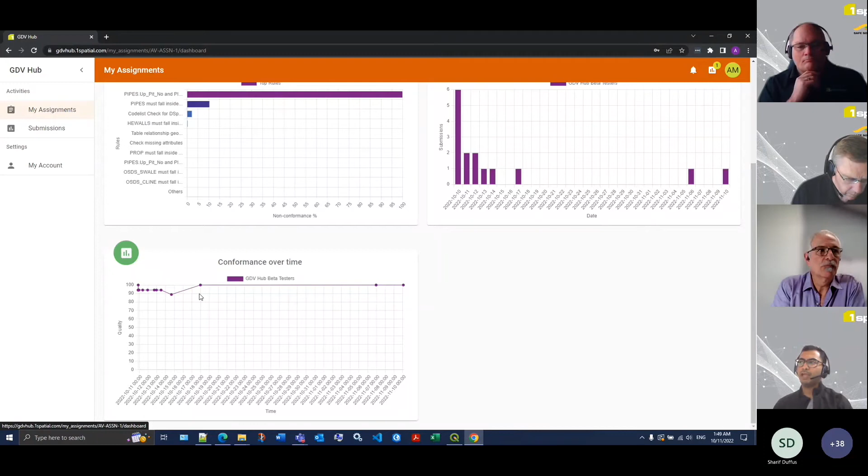It shows how the data validations are improving over time, which makes the validation process easier. We can know how the process is improving by looking at these metrics.

The final tab here is the saved mappings, which I'll demo in the submission. So to start a submission, we go to the submissions tab and click start a new submission at the bottom right corner.

We're presented with two drop boxes: the README file, which is optional, and the sample shapefile. Uploading is quite easy—you can either drag and drop to the box, or click on it to open up Windows Explorer.

I'm going to submit a shapefile, which I'll have to zip up before. So I'll zip the shapefile. I have the zipped shapefile here, and I'm going to hit continue.

It's uploading the shapefile, and I can see that there has been some mapping.

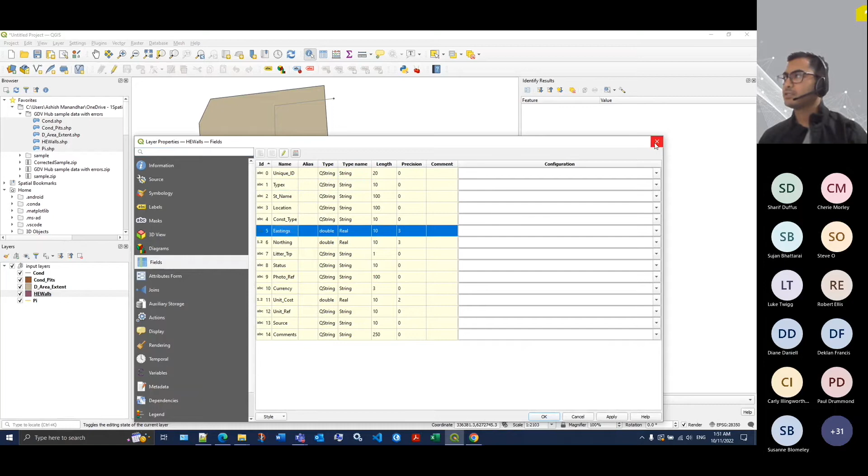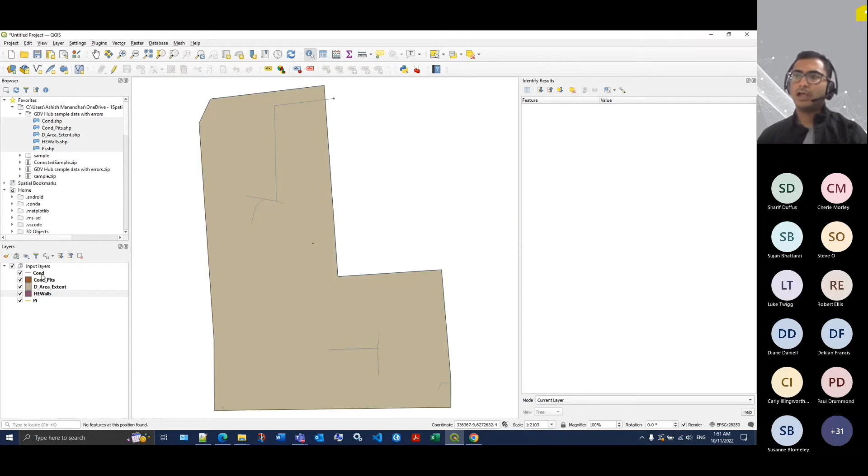And there are some spatial errors as well, like this pipe is outside, this conduit is outside the area of extent boundary. I can see there are conduits, but there are only a few conduit pits.

There are some checks which check the relationships between these two layers as well, and the features between them. We'll see how GDV Hub will capture these issues.

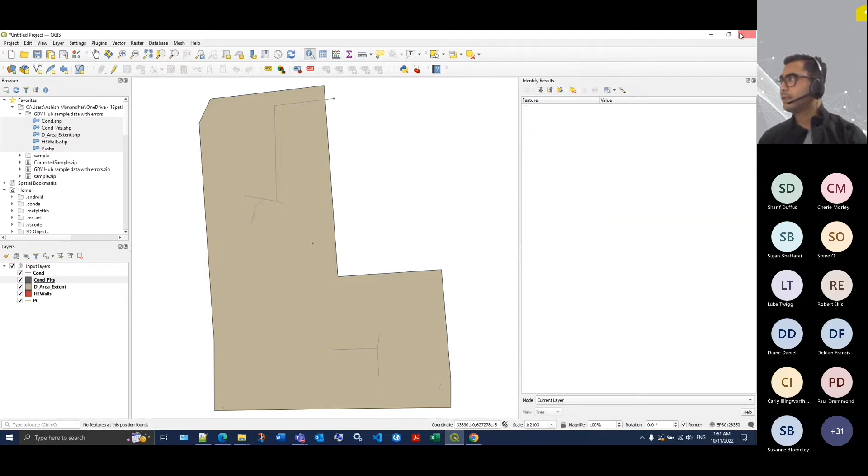So a brief on that—I can see these layers have been mapped. We've got a toggle button here which swaps the schema mapping direction. If I press this, I'll see my submitted source classes on the left and the target mapped on the right, and I can easily see there's an extra class PI which cannot be mapped to anything else.

So I'll hit continue at this point.

We've got a number of checks in this process, and all the checks are done sequentially. There are a few read user-supplied data tasks, and we've got a few internal tasks to calculate the necessary parameters or do some necessary calculations.

Then we've got a credit check task, which checks if you have enough credits to run the process or not. We'll discuss the credits and payment process in later slides. For right now, it's paused, and I need to hit resume because I do have enough credits. So I'll hit resume.

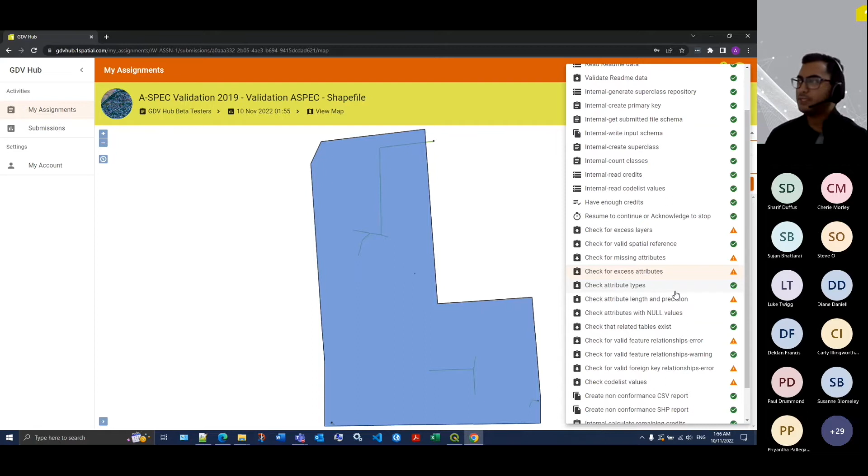Similarly, we've got attribute type checks, which checks if it's the correct attribute type. We've got attribute length and precision checks. One example here is the layer conduit failed attribute length check and length and precision check on attribute conduit eastings. Similarly, we can go through all of the errors that we found.

I'll go through some of these errors. So let's check the relationship errors.

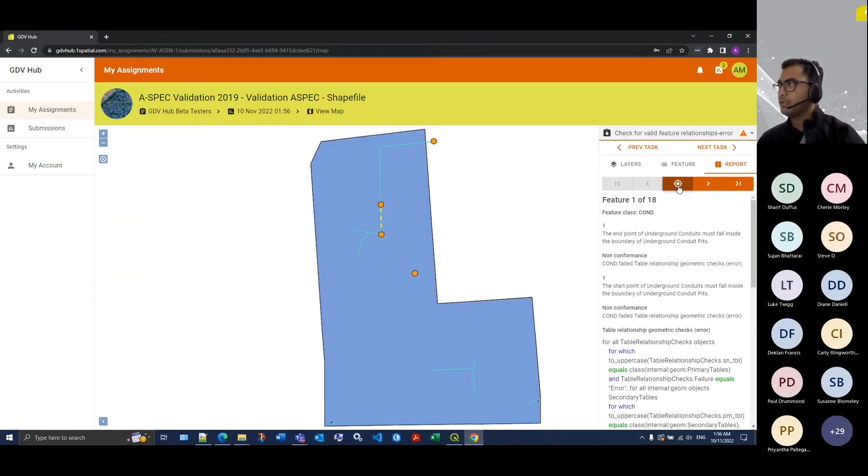Clicking on the report, so these are now feature level kind of errors. I can click the target button to see or zoom into the feature that failed. So this feature failed the rule.

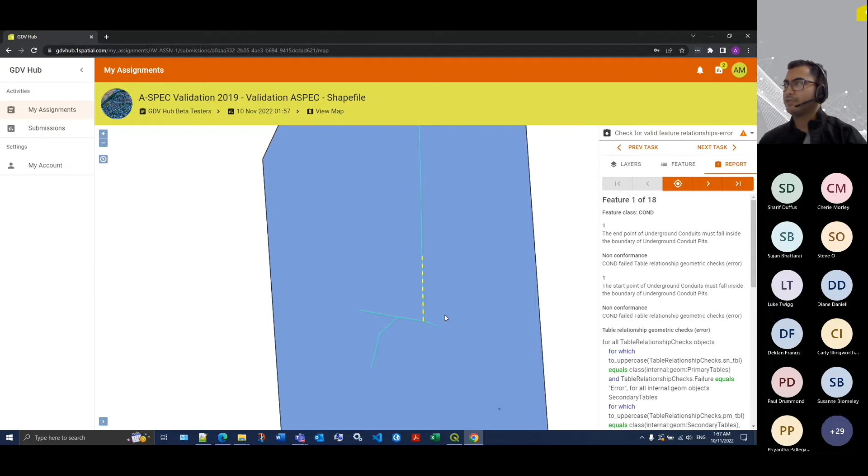The endpoint of the underground conduit must fall inside the boundary of underground conduit pits, but we have not supplied enough conduit pits, and that's why this conduit failed this rule. So there is no conduit pits on either side of the conduits, hence it failed these rules.

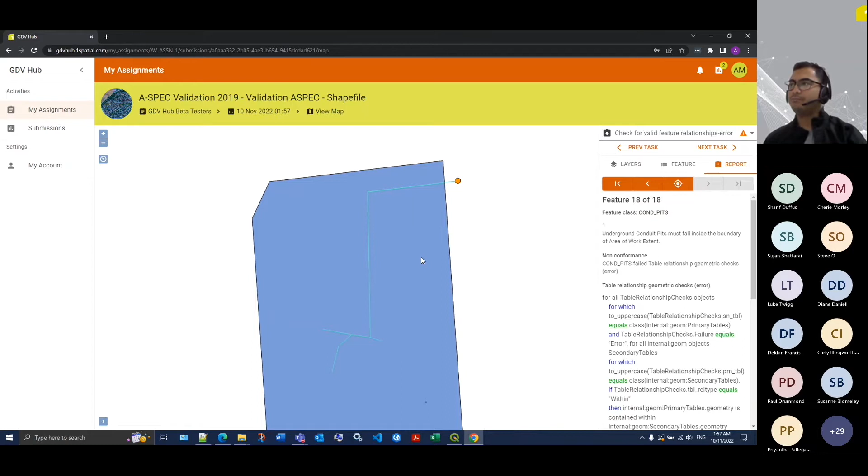So we've got a couple of conduits that fail these rules. We can jump to the last one as well. And this one shows that this conduit pit should actually fall inside the area of work extent, but it's outside the area of work extent. So hence, these kind of spatial errors are also detected by GDV Hub.

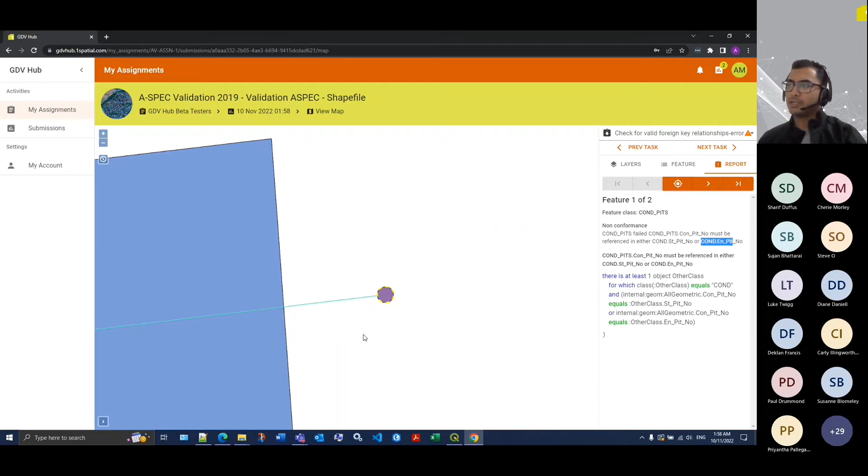The other type of errors we've got are attribute-based foreign key relationship checks. So if I zoom into this, I can see it failed the rule: conduit pits dot conduit pit number must be referenced in either the conduit start pit number or the conduit end pit number. But if I look into the feature of this, I can see the conduit pit number is 39A.

But if I click on the conduit here and look at the conduit start pit number, it's M8, or the end pit number, which is M18. So that's why this pit failed the rule.

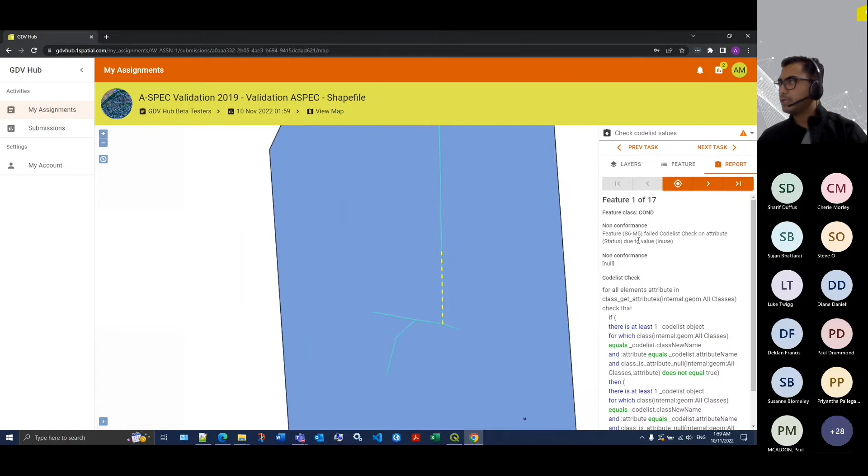Similarly, we've got code list value checks as well. I can click on this zoom button, and I can see that this feature with an identifier S6M5 failed the code list check on attribute status because of the value 'in use'.

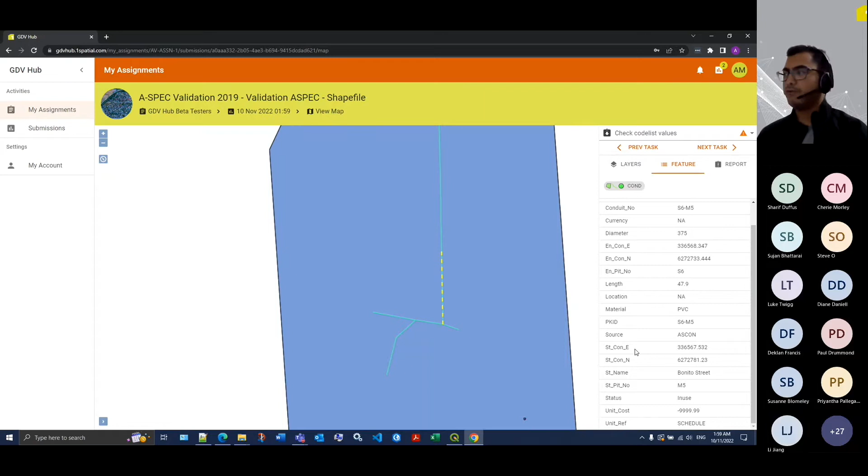So if I click on the feature, the status is 'in use', and it failed this check because the actual value or the allowed value in status is uppercase 'IN USE'. So there's a string mismatch, a case mismatch here.

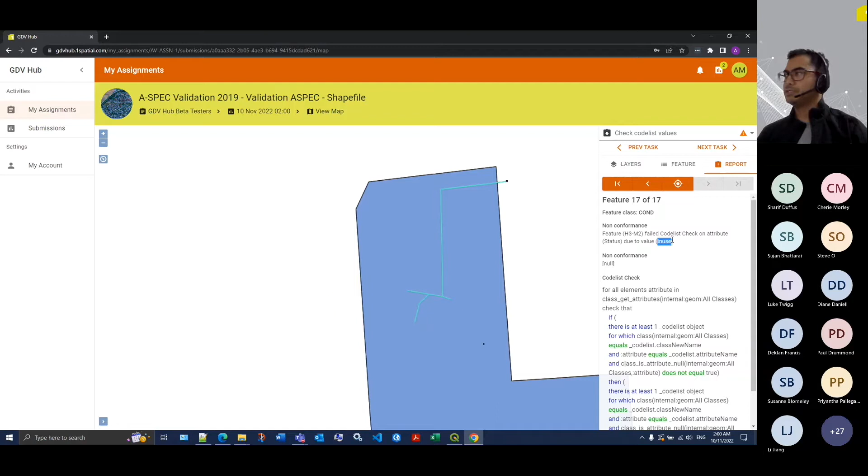Similarly, we can find other issues. These are all for 'in use', but let me see if I can find some other issues. All of them were errors in different features - code list errors due to the value 'in use'.

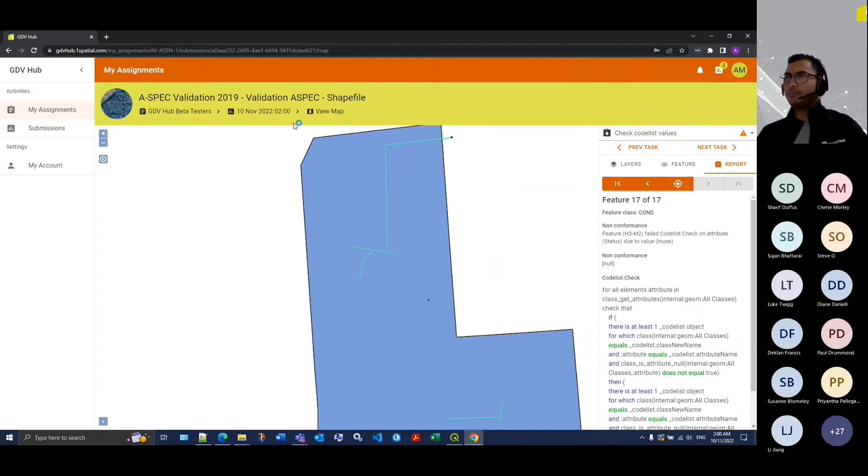Can we see this information in a report now? Yep. Okay, so after we've gone through these checks, we see that the submission has been rejected due to these non-conformances, and I'll hit acknowledge.

After we've finished the submissions, we can get the report here: download the non-conformance CSV file, or download the shapefile if it's got the geometry in it as well. So I can download these. I'll open up the CSV file first.

So I've got an excess class named PI, which I might need to delete from my file. I've got some missing attributes in the class name HE walls, and those missing attributes are type and easting. Similarly, I've got some excess attributes in HE walls, which are these two attributes. I need to check the length and precision of these attributes, which are under these layers.

And similarly, I've got these features which failed the geometric errors, geometric checks, and I've got these code list errors in these layers. So we've got a CSV report of the non-conformances, and we have also got a shapefile which we can show here. I'll open it up in QGIS.

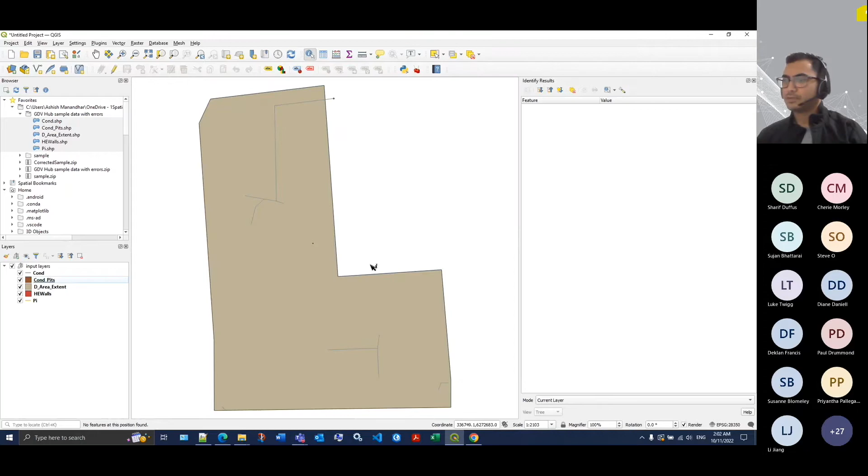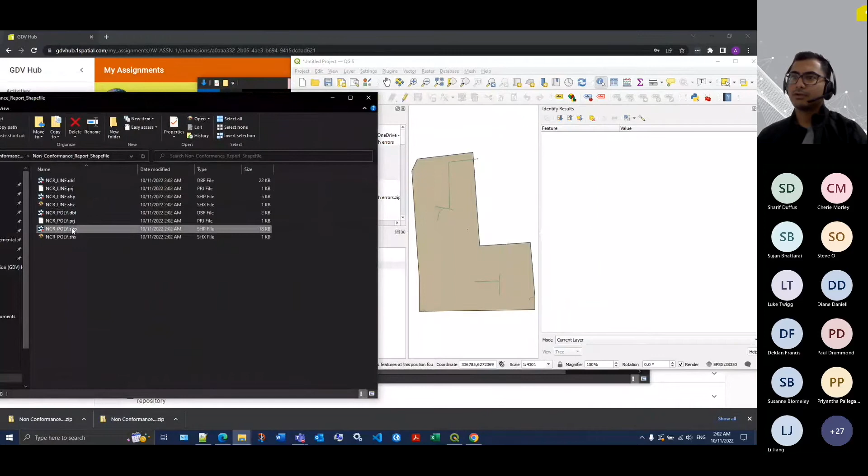Right. And I've got the non-conformance shapefile, so I've got these two, polygon and line. If I turn off the other input layers, I can see that these are the non-conformances. And if I open up the attribute table, I can see the same thing.

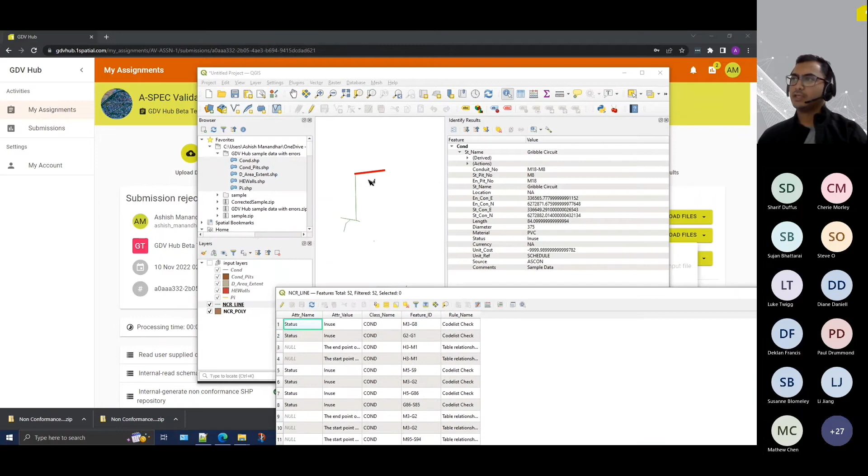I saw it on the CSV, but right now I can see the geometry and I can make corrections as I want on my data set. So that was the validation process.

Is there a report that shows that I can show? Yes, we've got a summary PDF report as well. So we've got a PDF view report, and if I hit generate PDF, got it downloaded, I can see that the submission was rejected due to non-conformances.

And if I scroll below, I can see there were some excess layers, some missing attributes, excess attributes, and geometric errors as well. So this report tells us it's been rejected due to the non-conformances.

Okay, thank you. Okay, so that was the validation. Now I'd like to go through correction.

Here is the same process, a similar kind of process. Here we are doing logical corrections on the schema of your submitted file. For example, correcting the attribute types, correcting spelling mistakes, those kind of things.

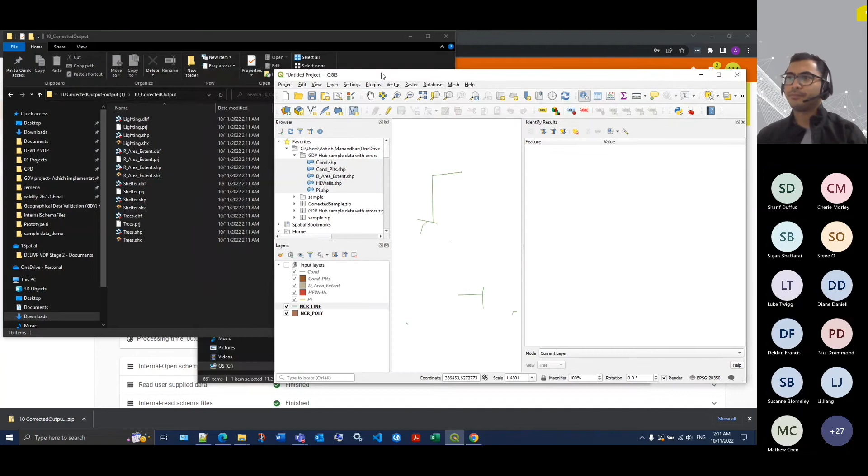So the easting and photo ref, these attributes, they were easting X and northing X. So now the attribute name has been corrected. Check on the trees as well.

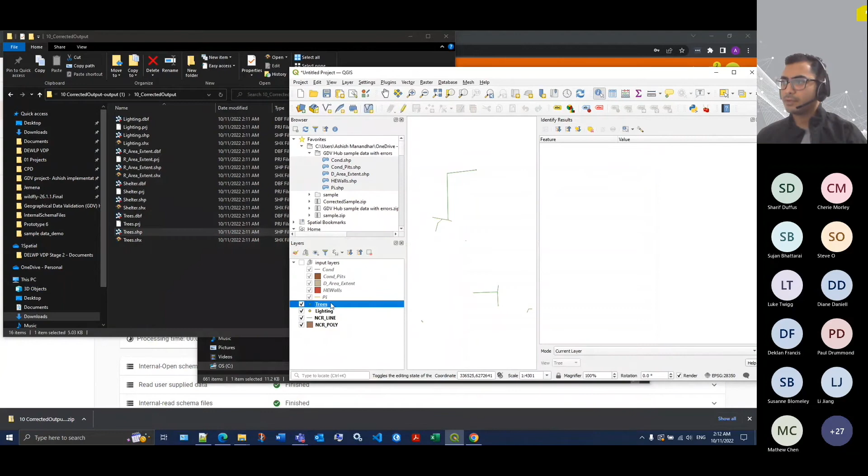Yep, so it's corrected those attribute mappings which we provided, yes, for the age of trees as well. So we can get these corrected files.

Is that the file that then gets submitted to the referral authority? Yes, that is. So we've got a report here, generate PDF, and you can see the submission was successful, and the file that's produced is to be submitted to the referral authority.

So this was the user view. If there is an administrator, we can see the dashboard of all the submissions done by multiple users in your organization. We can see the different submissions per day, or even check on submissions. So we can view the submissions different users have provided, and we can download the corrected output files and the reports from here as an administrator directly.

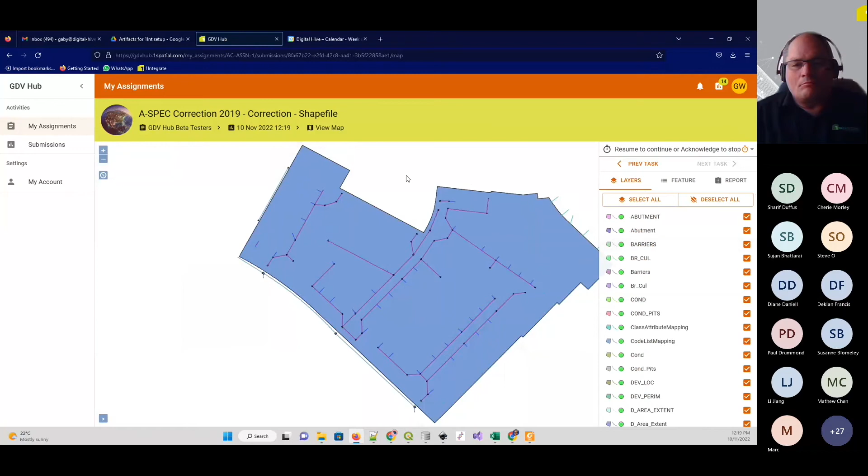Okay, and I want to go and look at this particular error. See how that goes in terms of that map. I see this is what happens to me, and I think it's the browser that I'm using is perhaps an issue. I'm just going to go to the CSV.

I'll acknowledge this and go and look at my errors. I find that looking at these errors, like the error files, the non-conformance shapefile, all those error files, those things are really helpful. So if I go to the output, let's just make sure that, and I'll just open it up here. Give me a sec.

So if I put that on here, just going from the top down, comparing the SRIDs, there's some issues there. Missing attributes, FID, comments, attributes - in other words, these fields don't exist, and they should exist.

Okay, this check attribute length and precision - this is similar to what Ashish was talking about. I'll have to go look at the detail in the shapefile, but what this is telling me is that the precision on the eastings and northings is probably configured incorrectly. And so with all these others.

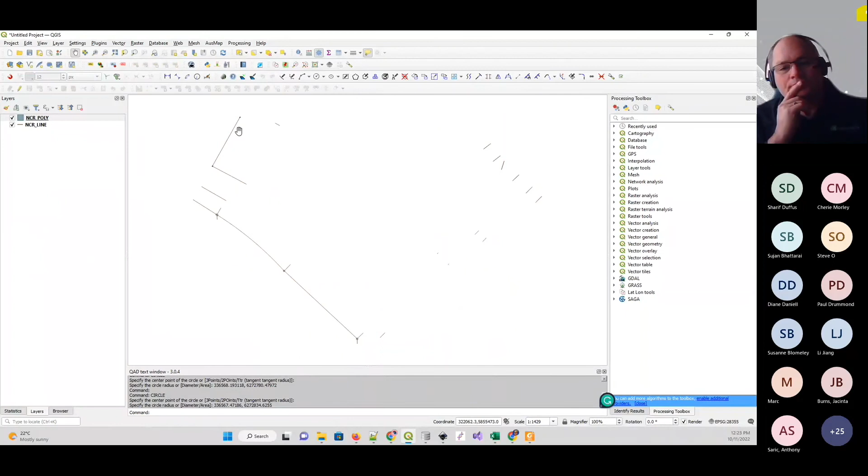Just load these up. So these are the errors that I've received, or the errors in the shapefile. What I'd like to do is open the attribute table, and you can see geometric errors, pits against the area of works. So if I load my area of works from that submission, if I can just find it.

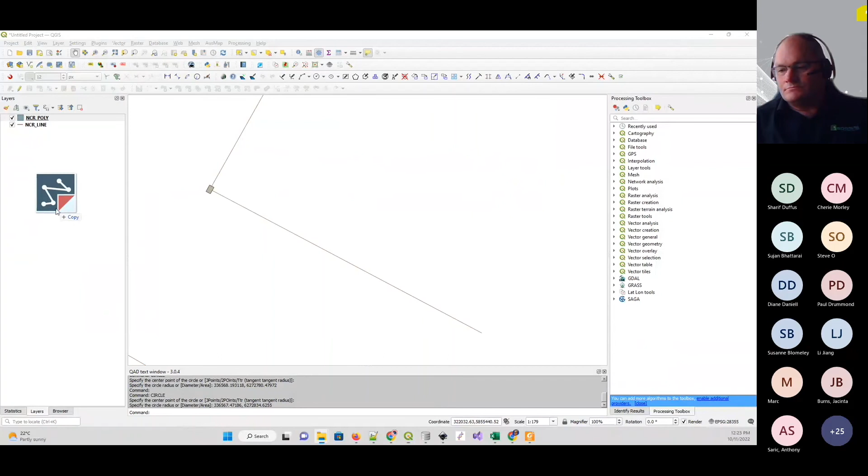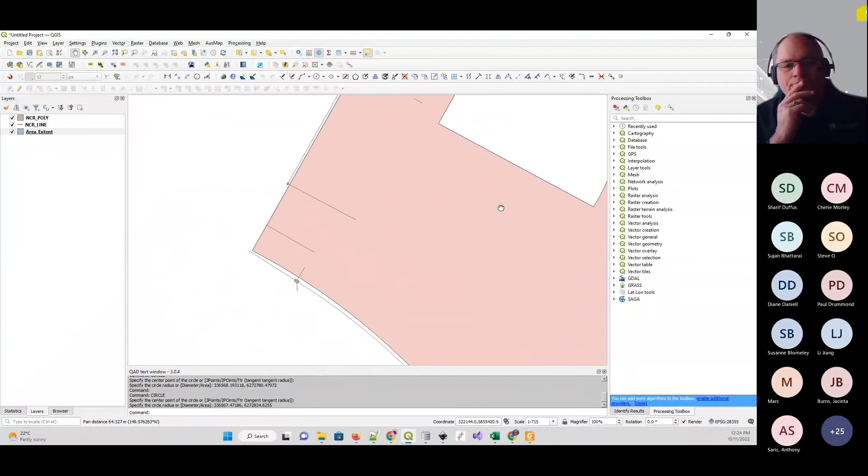Then there you go. So those, I'm just going to change the color so it's a bit better to see. All right, so you can see all of those errors that were outside - there's a bunch of features that were outside. Let's see what's happening with that one that's inside. What was that all about?

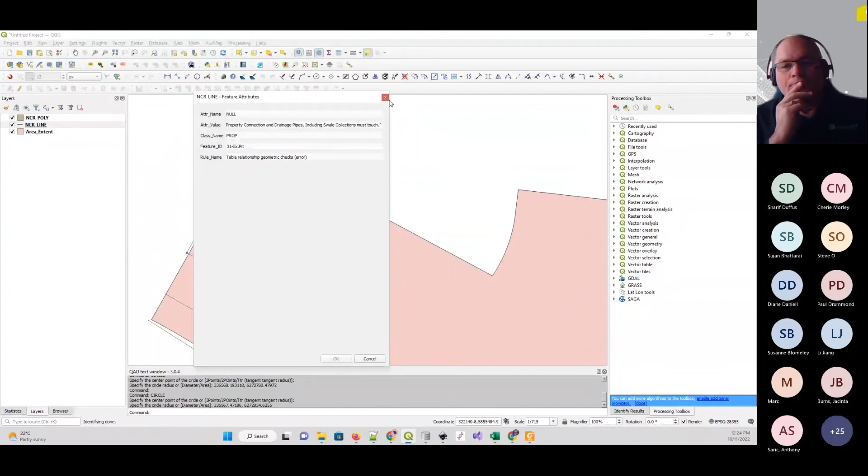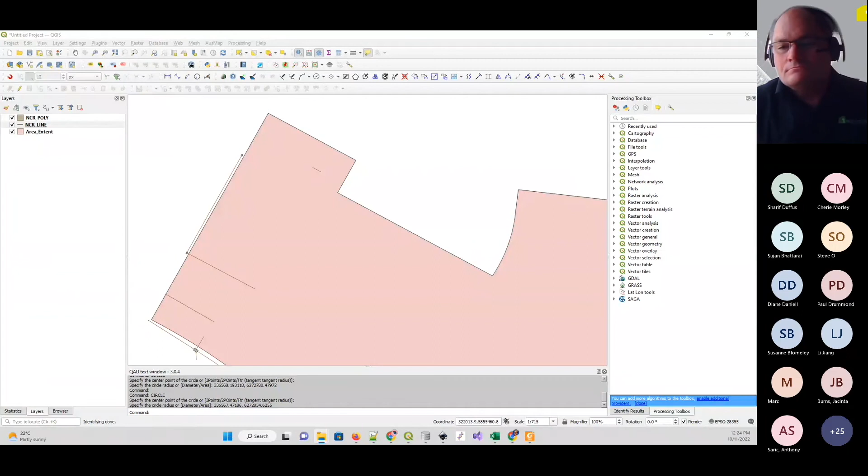So property connection drainage pipes, including swale connections, must touch. So there's probably a swale underlying that didn't touch. Sorry, I can't find the swale. How did I look at it? It's probably that, yeah, the rules on - there should be an existing swale.

In the submission, this is what I've got. I know what it is - there is a swale center line, but there's no swale or anything associated with that. So that's a weird one. What was this one? Okay, now that's one I wanted to query. I'm just going to turn all of these off.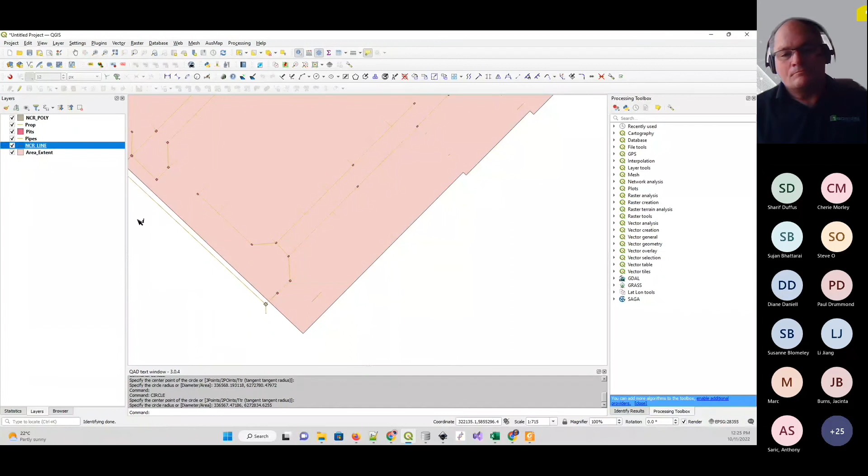Property connection and drainage pipes, including swale - so that property connection and drainage pipes, there's some error there. This is not clear to me at the moment, please help me out. What is the meaning of this one? Geometries of property connection and the drainage pipe, including swales - so the issue here is the property connection or drainage pipe, including swale connections, must touch.

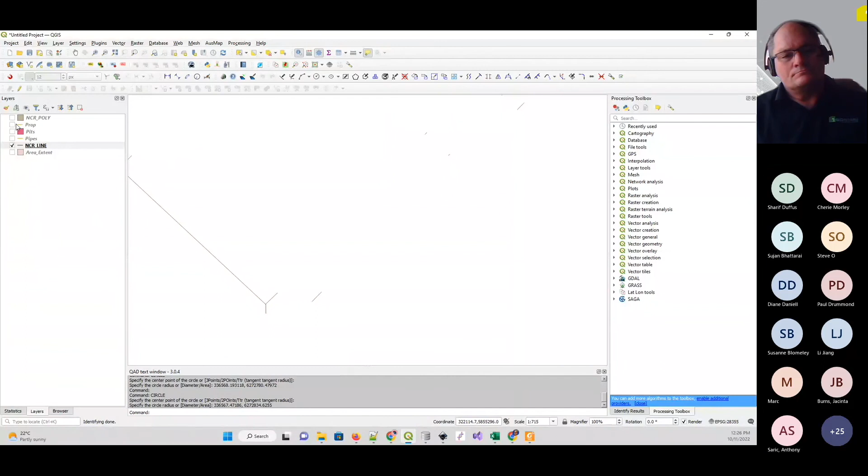Yes, so that's a property connection, property line, which should touch with a swale or - okay, you know what? There's no pipe or pit that this is connecting to. So I'm assuming that our message is not completely clear there, but the fact is that this is an orphaned connection and it's not connected to anything, which is what I assume is going to be the issue here.

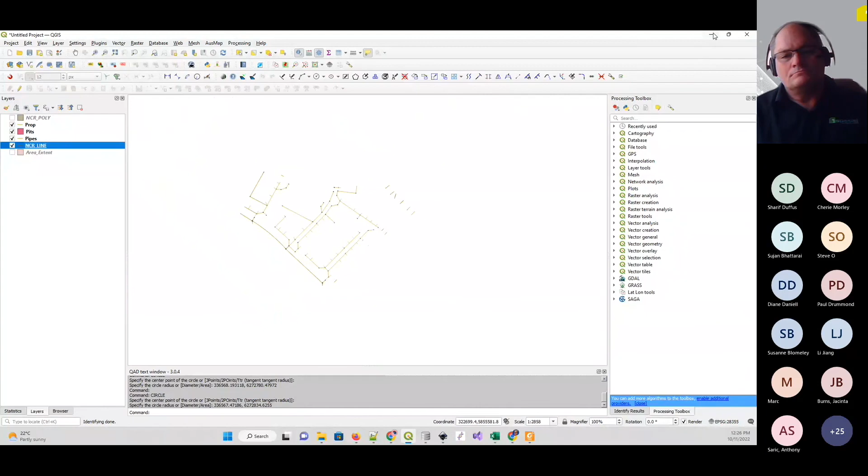So let me just go and check if there's any other submissions. Nobody? No? Well, back to you, Andre.